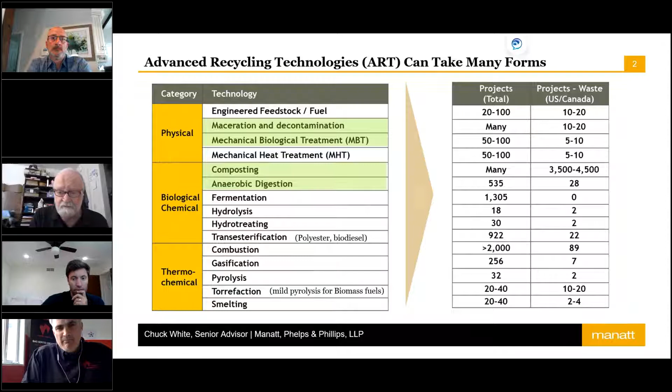Advanced recycling technologies are non-incineration technologies; this isn't mass burn. It converts the non-recyclable portion of the solid waste stream to electricity, fuels, and/or industrial chemical feedstocks. Waste to energy, fuels, and chemicals was an acronym that Scott Smithline, the former director of CalRecycle, back about 10 years ago, tried to push forward, the idea that maybe we should look at these additional kinds of technologies. And the reason for doing so, it would enhance the circular economy to allow these materials to be returned to useful, beneficial use within the economy.

Less reliance on fossil extraction, there's greater revenue potential, and other benefits involving lower greenhouse gas emissions, maximizing the recovery of recyclables. They can be community sized and scalable, much more efficient and versatile. And the three technologies I really look at the most, although there's many others, are gasification, pyrolysis, and process engineered fuels that can be used in industrial furnaces such as cement kilns.

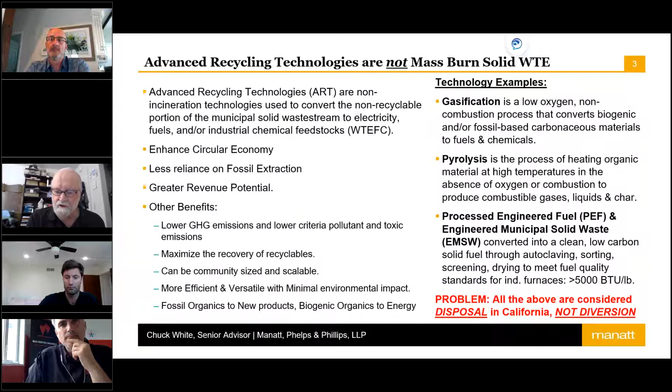You've got all these provisions in the Public Resources Code that basically prevent you from using advanced recycling technologies because they're either a form of what's called transformation or engineered municipal solid waste conversion, both of which are considered to be disposal. There's a couple exceptions to that.

For example, there is a definition that allows gasification, but the kind of gasification as defined means it cannot use any air or oxygen at all and can't have any discharges to air or groundwater, and can't produce any hazardous wastes. Well, there's few things that are possible without any discharge at all or any kind of production of a hazardous waste. And that should not be the criteria. It should be whether or not these discharges or production of hazardous waste or other contaminants are managed within the environmental criteria otherwise required by the state of California and elsewhere.

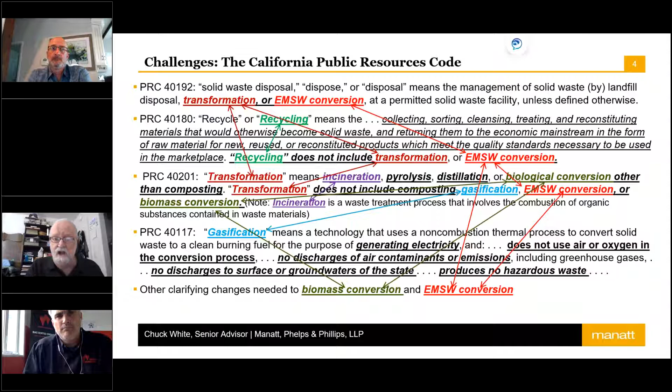And that's the real issue. We shouldn't just simply define these technologies or these kinds of things out of the equation for consideration to help us reach these 75% and beyond to really achieve a true circular economy.

What are the environmental concerns? Well, advanced recycling technology, otherwise known as conversion technologies, which is kind of a bad term these days. It conjures up a thing of dirty energy and this sort of thing. But these are not really waste to energy mass burn projects. They really shouldn't be controversial because it really would help and maximize the beneficial recovery of other kinds of materials, and glass and metals can be more easily recovered.

Plastics and organics, fossil organics, can be recovered to make new plastics. They don't have to be burned. They can be broken down to the molecular level and reconstituted into new products. And that portion of the waste stream that is non-fossil organic or biogenic can be made into low carbon fuels. Is it unproven? No, most of these technologies are in widespread use around the world.

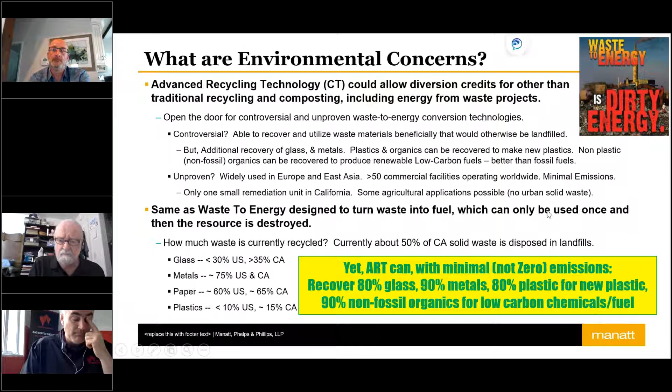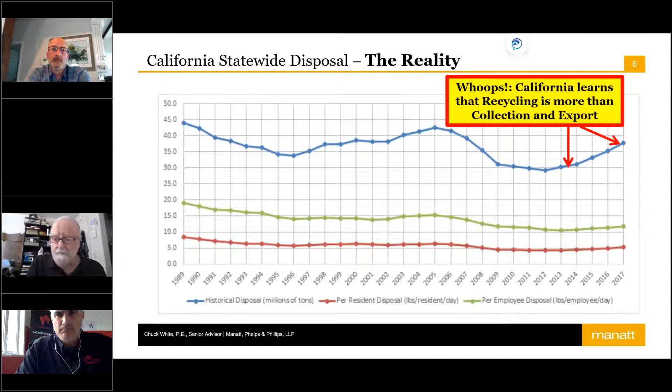But wait, there is this thing called SB 1383. If this was in person, I'd ask everybody, have you ever heard of 1383? And there'd be a large chuckle, I'm sure, from the audience, because of course you've all heard about it. And of course, the purpose is to divert organic waste from landfill disposal to reduce methane emissions that are coming from landfills. 75% organic waste reduction by 2025. I'd ask for a show of hands now. How many people think we're going to meet 75% organic waste reduction by 2025?

It's highly unlikely. And the other issue is a word of caution: even though it's 1383 recycling, the 75% recycling, it's not the same as AB 939 diversion. And this is kind of highlighted by this Article 2 that's in the 1383 regulations. It allows other technologies that constitute a reduction in landfill disposal of organic waste. Those technologies include recycling centers, food recovery, composting, anaerobic digestion, biomass conversion, land application, animal feed, but also a new area called approved operations that reduce short-lived climate pollutants.

If you have such a technology in an operation, you'd have to apply to CalRecycle with review by CARB, but you can't do it until January 1 of next year, because that's when the regulations take effect, unless the regulations get delayed by pending legislation, which is being considered. So the problem is you can't really get access to Article 2 until the regulations become effective. You've got to show that the greenhouse gas reduction is permanent, but it could include waste to energy, fuels, and chemicals. And you've got to show that the diversion of organics is equivalent in landfill methane reduction to that achieved by composting, for example.

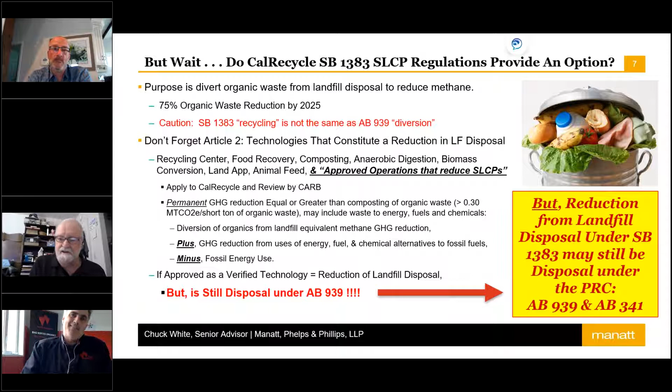But the big catch, as I mentioned above, is it's still considered disposal under California's AB 939. So it could be reduction from landfill disposal under SB 1383, but it would still be disposal under PRC if you're using some of these advanced recovery technologies. And that's obviously an issue that needs to be fixed as we move forward.

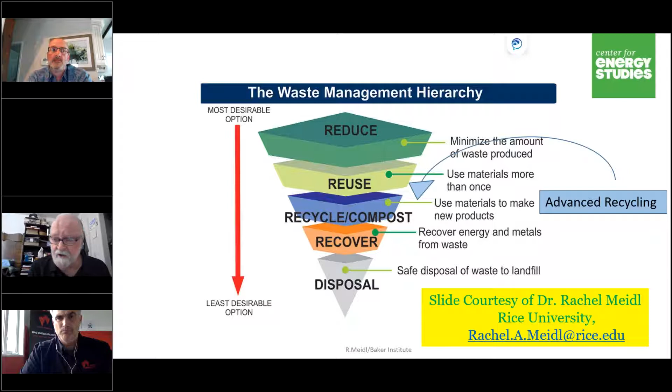And here's the plastics problem, particularly as pointed out by Dr. Meidl: in the US and Canada, 90% of plastic waste ends up in a landfill or is incinerated. And that's basically 34 million metric tons, which cost billions in disposal fees. The lost commodity value from unrecycled plastics is even greater.

And really, there isn't anything that can be done with plastics other than to break them back down into the component molecules and make them into new products, or if it's low enough carbon and doesn't raise greenhouse gas emissions concerns, use it as a source of energy. But fossil plastics, in my view, need to be limited to only recovery of the molecules for purposes of making them into feedstocks to produce new products and materials.

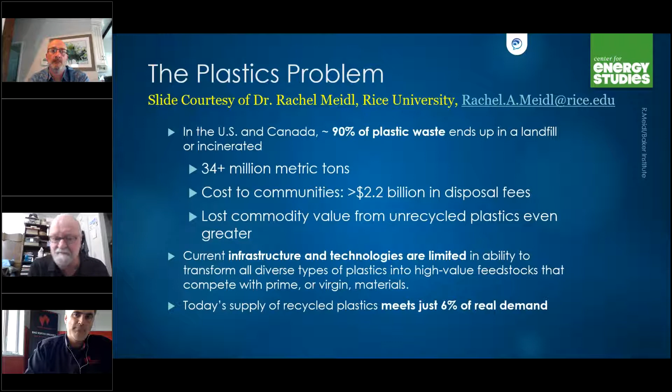And today's supply of recycled plastics just meets 6% of the demand. For 94% of plastics there is not effective use. And that really causes problems, as is pointed out in this next slide, again, courtesy of Dr. Rachel Meidl, Rice University.

California has these competing priorities. In fact, they've always had competing priorities. For example, zero emission vehicles by 2030, and hope to have all vehicles, including trucks and buses, zero emission vehicles by 2045, if not sooner. And plastics are the second most commonly used material to make low emission vehicles, 50% of the vehicle volume, and that's probably going to be increasing. And there's 39 different types of polymers and plastics that are used in zero emission vehicles.

And current recycling of plastics in cars is very low quality. And so you really can't access it without taking these advanced technologies and breaking the material down into its component parts and reconfiguring it into new products and materials, hopefully new zero emission vehicles. You've got this 100% requirement also for carbon emission-free electricity by 2045 or even sooner.

There's an increased demand for complex multi-material plastic for wind blades, for solar, for electrolyzers, but the only option really for most of the waste from these kinds of activities is landfill and incineration. So increased mining to produce more minerals is going to produce more waste. Reliance on offshore supply chains for extracting and processing. All this can be addressed if we could have access to advanced recovery technologies to recover the molecular value of materials that are ending up in the residual waste stream.

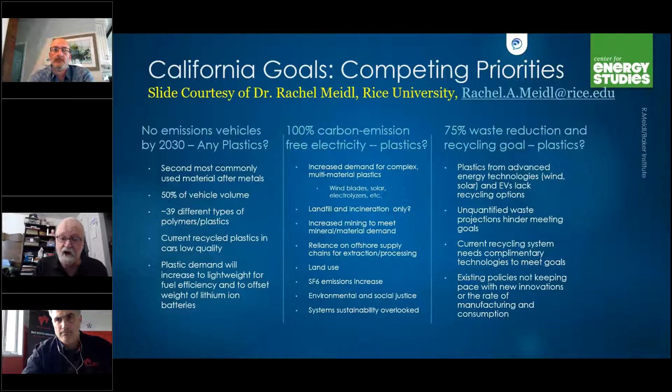So I'm finished for that. That's kind of the lay of the land as I see it. I think we've got a lot of work to do with the legislature and the administration and our friends in the environmental community to try to get them to understand that in order to get 75% or more, and really create a true circular economy, we're going to have to open the door for advanced recovery technologies sooner rather than later. And it's been a long time coming, and we still have a long ways to go.

So hopefully the folks that are going to be coming after me in today's session will open the door further for some specific technologies that will allow the enhanced processing and recovery of residual solid waste.

I'm going to go through a process that TORXX developed over the last year to repurpose typical MSW fines that up to now were mostly going straight to landfill because they were too hard to upgrade or turn into a usable product. So basically, using our Pulverizer technology, we've been able to fraction the material enough to allow recovering up to 70% of its organic content.

That material is coming from the front end pre-screening of mixed waste, and it's still really rich in organics, especially on the West Coast or in regions where it's all in the same bin. So by processing that material and recouping the organics, they can easily be mixed into compost feedstock, or used for land application or any organic application that's available on the market.

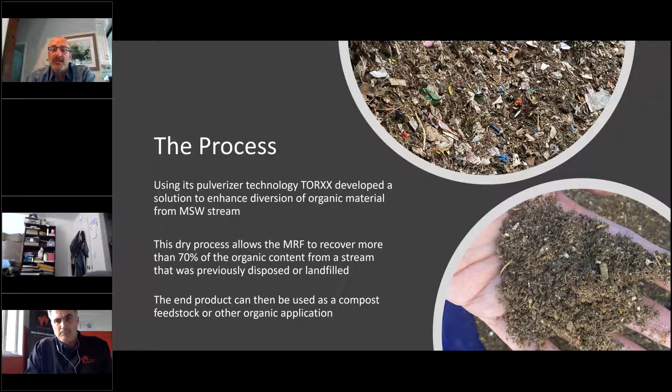So basically how it works is we rely solely on aerodynamic physics that we developed. The machine is not grinding or cutting the material, the machine is agitating the stream into vortices, and basically because of the matter-against-matter action, once the material gets into the machine, it liberates the organics and pulverizes any aggregates that are in there, like glass or little rocks. Those will turn to silt, which is in fact beneficial for compost.

But the other big advantage is the softer material. Think about juice pouches or chip bags. Those will not be destroyed, so after it's been processed through the Pulverizer, you can easily classify it and screen it with conventional techniques.

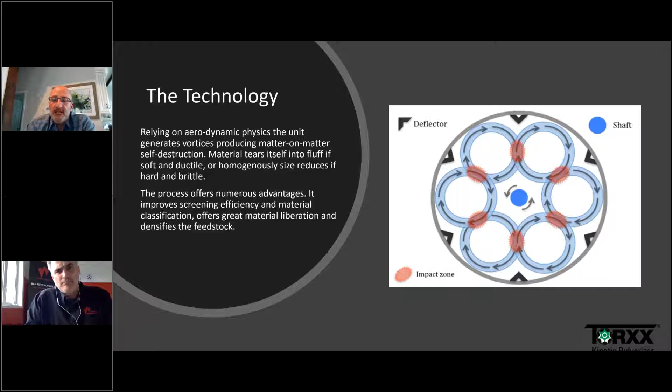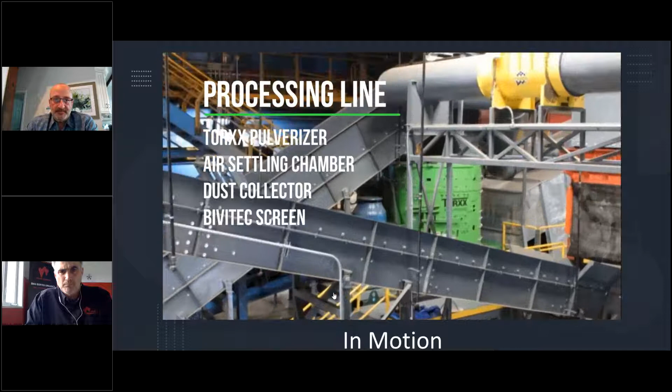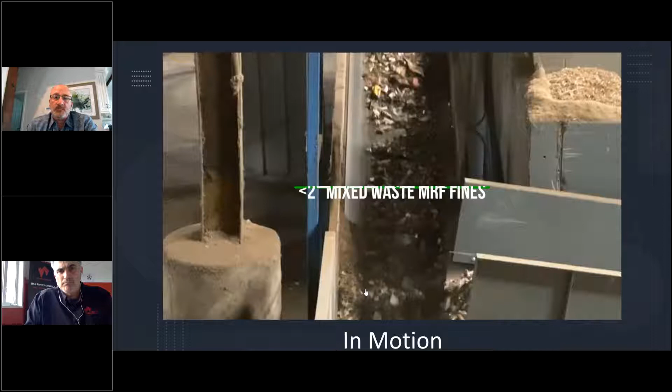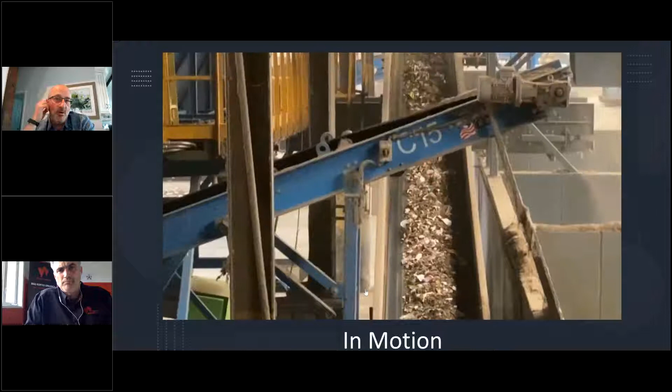So just to give you an overview, we'll go through a quick video of an installation we have in place, which is actually processing those mixed waste fines. So that's the actual feedstock that was going to landfill previously, which is all the 2 inch minus material coming from the front end. We're metering that material to the machine at a pace that ranges between 12 and 14 tons an hour, which pretty much meets the requirements of a medium to large scale mixed waste sorting facility.

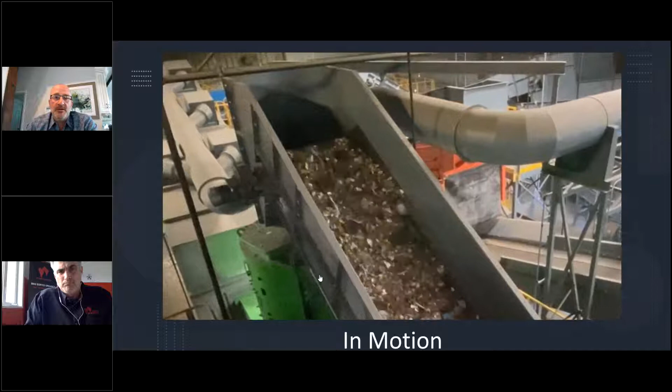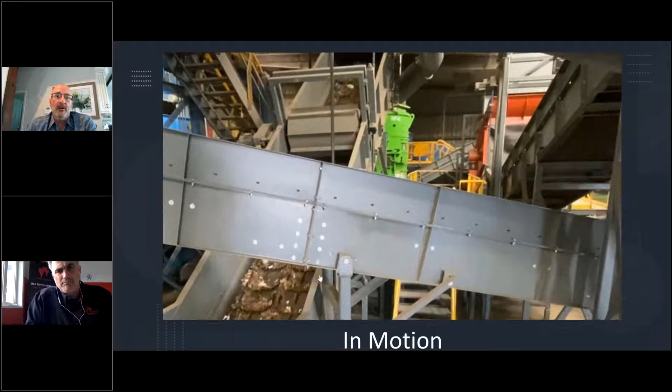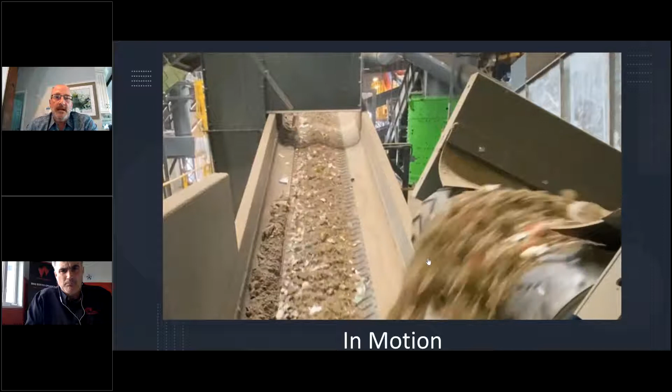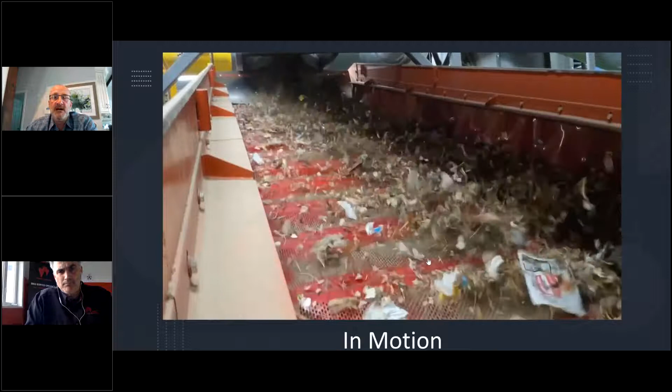So all that material is introduced all together into the machine. Then the pulverizing action happens from there. That's the output of the machine that we are migrating to a screening media like you see here. All the oversized fraction is mainly trash, things that are not organics because they didn't size-reduce. And on top here, that's the organics material being homogenized and size reduced by the pulverizing process. And on the bottom, you have your actual residue.

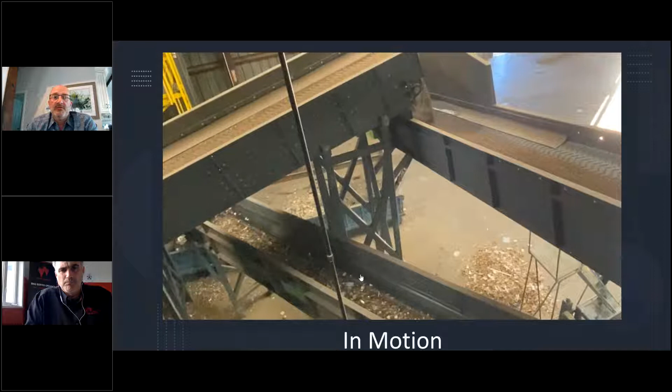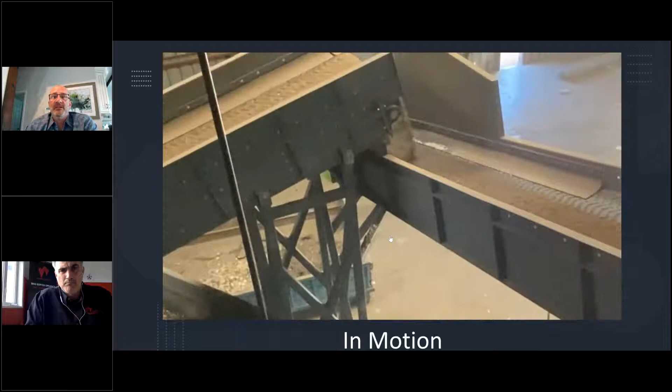So up to now, we achieve pretty much 70% of the inbound weight of that 2 inch minus mixed waste. Pretty much 70% by weight comes out in organics that can be mixed with compost or used for land application or any organics fraction. So that's what the organics material looks like at the end of the process. That's the screened material that we've already seen people using for composting.

So you see it's really granular, it's really consistent in size. So what we also figured with the machine is there are multiple other applications that we can run, or multiple other types of feedstock, like shingles, for instance, compost overs that are actually discarded because of the difficulty of removing the contaminants, land clearing debris, C&D fines, which have also been a topic the last few years. So by processing it through the pulverizer, we actually greatly ease classification of material and repurposing of good material.

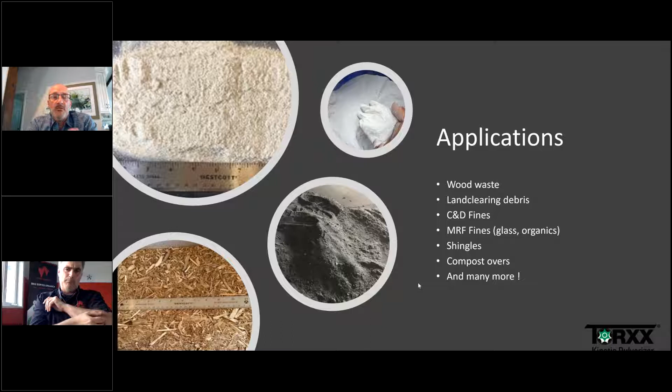So that's pretty much the concept we had in production.

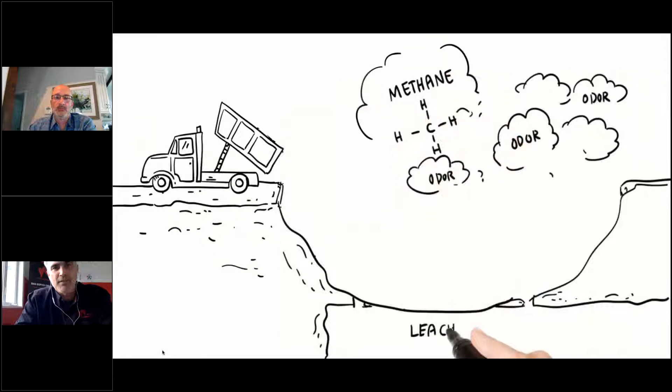So we're Waste Robotics. The presentation is about two methods of collection for the organics, what we call organic co-collection and organic cart collection. So we're going to try to show the difference. We all know that the overall target for diversion of organics from landfill is trying to limit the fugitive emissions, mainly for GHG reasons.

Most of the systems right now targeting collecting this organic use a three bin system. So we have the garbage, we have the recyclables, and usually people will add a third route for collecting the organics in a third bin. What we are proposing is that instead of deploying a third cart and a third route, we distribute bags, and we ask the citizens to put the organics in that bag, let's say the green bag, and drop that green bag within the garbage bin for co-collection at the same time as we're collecting garbage.

So it seems to pause here. Sorry. Well, you get the idea.

And thereafter, the idea is that we're extracting the organics with a robot. So the idea of picking up with a bag system is hard to implement if you don't have an automatic way to remove it, and it's fairly difficult to remove it. We have a lot of recycling pains right now in MRFs and others. So to say we're going to do bag collection and remove these bags from the MSW with people just doesn't make much sense.

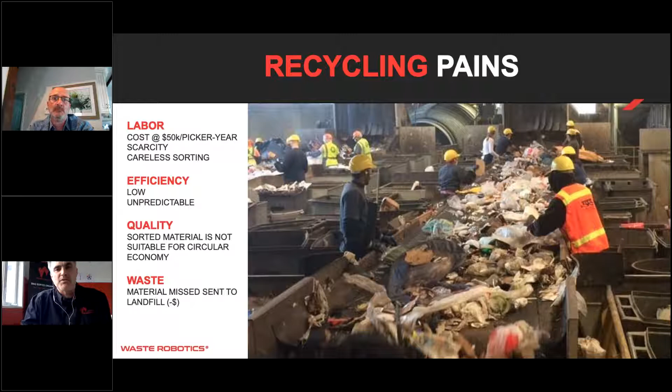So what we're coming in with is technologies to recognize these bags on the belt, capture them with great accuracy, and reconfigure systems. So the bag system and robotic sorting combined becomes really interesting, because now you have the ability not only to save on collection, but also when you have to sort it out, you do it very efficiently through a robotic system. So I'll try to show a video here.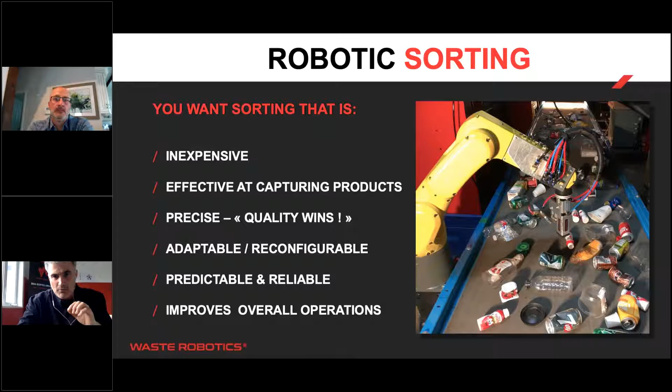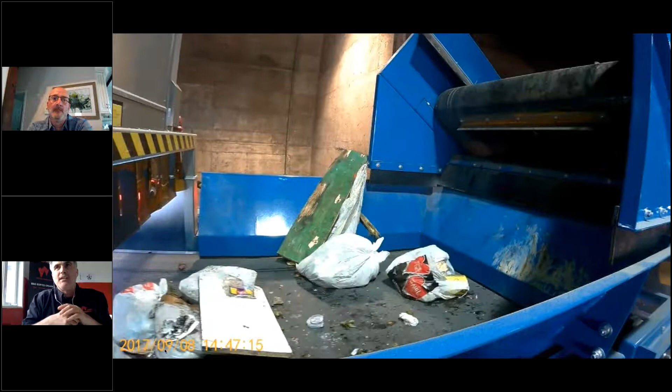So this is a system we have in the incinerator in Quebec City. People put their organics in that little green bag that you see there, and the robot detects it and goes and picks it out. So this is MSW without any screening, straight off the tipping floor, being loaded right onto the line, and the bags being picked. The rest of the material goes straight into the incinerator. So this is in a nutshell what this shows. So what are the value benefits and what does it do?

What we have observed in Quebec City, they've run different pilots and compared the efficiency of carts versus bags. What we discovered is that you get a much higher organic diversion, because people participate, because we distribute these small kitchen counter bags. People participate because it's clean, because it's easy to use. People just throw their stuff in there, tie it up and put it in their garbage bin. So overall, there's a lot of interest from the citizens to participate because it's easy.

The cost of collection is reduced by about 50%, because if you're going to run a third route for the next 20 years, for example, compared to just distributing bags and running the robot, the overall difference is about 50% in savings.

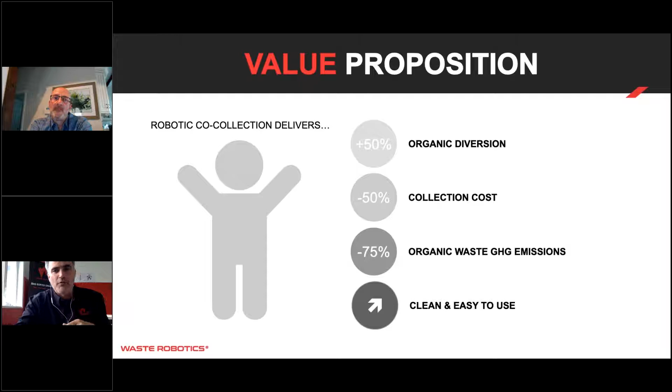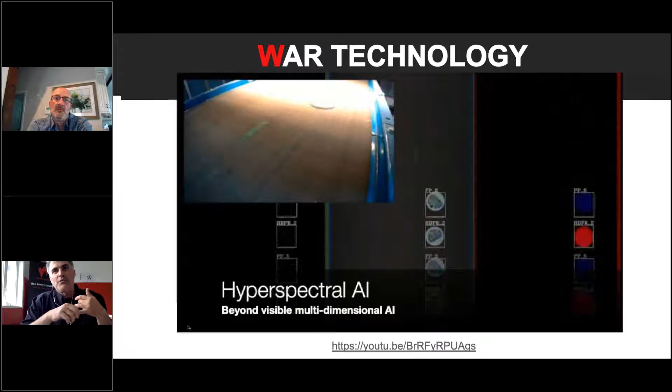So about the technology, just in a nutshell, what we do at Waste Robotics, we develop robots. So we have computer vision systems. We make scanners that will scan through the material. We look at the material through different types of cameras, hyperspectral, 3D, color. We can then be very precise in identifying products. This is very difficult to do with AI and/or humans, but with hyperspectral signals, we're able to classify this properly, and then we dispatch this to different types of robots.

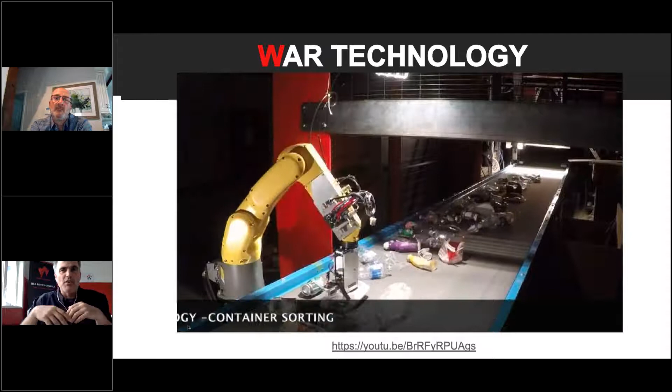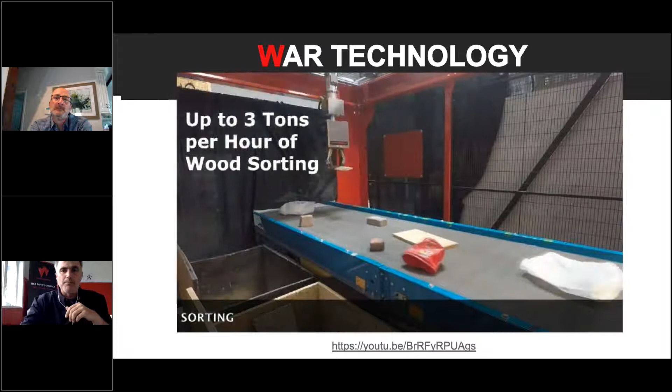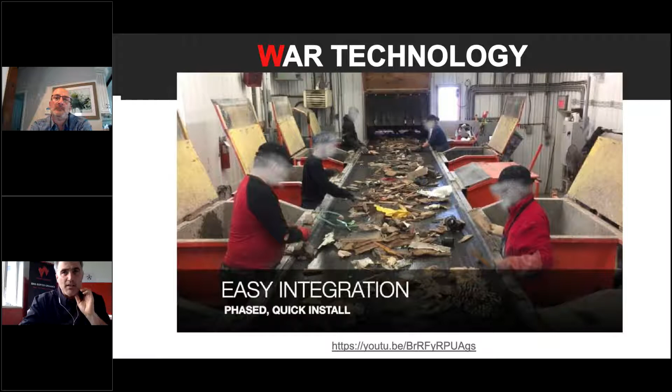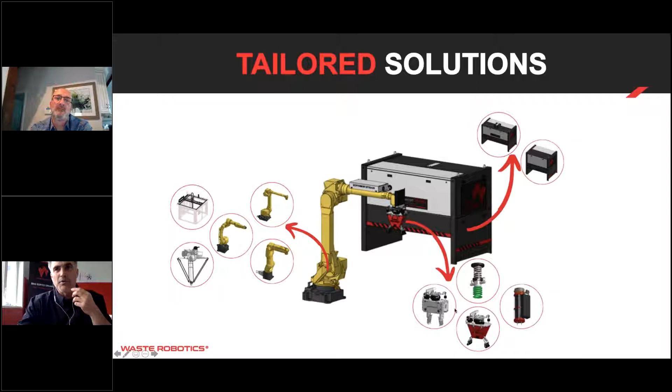So we are really into tailored solutions, the ability to adapt. Depending on the situation, we'll use different types of robots, different types of sensors and different types of grippers, because the overall robotic world is pretty much all about sensing and picking it up. The arm is kind of a commodity that we use to move that gripper in space and perform the picking.

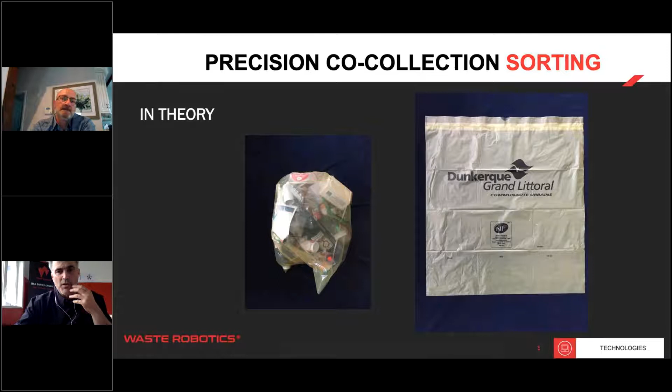Back to organics, we've come across different situations. For example, this is in Dunkirk in France. The city there said, okay, this is going to be easy, you're going to pick out yellow bags with your robot, but actually when the bag is filled, it's anything but yellow. So it became quite a difficult situation. These are the real life conditions that we're in right now. And that's where AI came in to help us, because just on color or shape it's very difficult, but we're actually able to collect these bags.

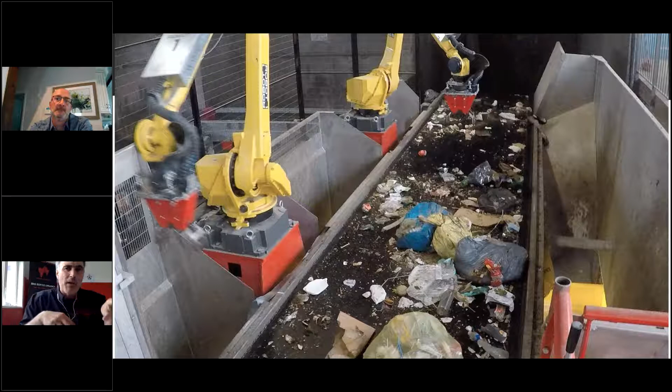Now, if you pay close attention, in Dunkirk we're not picking up organic bags like we are in Delano in Minneapolis. We're picking out recyclable bags. So that's another spin on this. What Dunkirk is doing now is their citizens put the recyclables in a bag, and starting the beginning of next year, they're going to have both bags, an organic bag and a recyclable bag. That's going to allow them to collect recyclables, organics, and garbage in only one truck route, which saves a lot of money, and GHG, which is one of the key drivers in this situation.

The other interesting thing about bringing robots to the situation is that it's the first time we actually have recording eyes on the conveyor. So we can teach one robot one trick and it can exchange it with another robot across the world. So if I'm picking out blue bags in Delano and run the same bags in Montreal, the learning doesn't have to be redone.

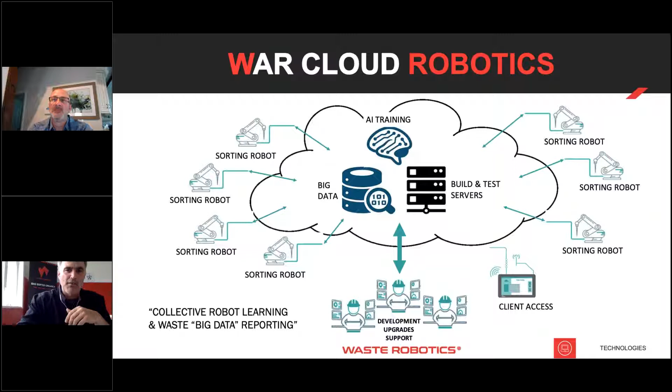But more importantly, not only are we picking out bags, we record everything we do. So we have the ability to replay the tape and reanalyze what's on the belt. And that data is getting very interesting, because people want to know, besides the bags and whatever you're picking, what else is left on the belt? That allows us to run statistics and composition analysis to assess the overall efficiency of the system and everything else.

And the other thing we do at Waste Robotics, some of our clients come to us and say they don't have capital. So we're offering what we call sorting as a service. We will make the capital investment if they commit to a contract, and basically they pay by the usage of the robot. We have a calculator online if anybody's interested.

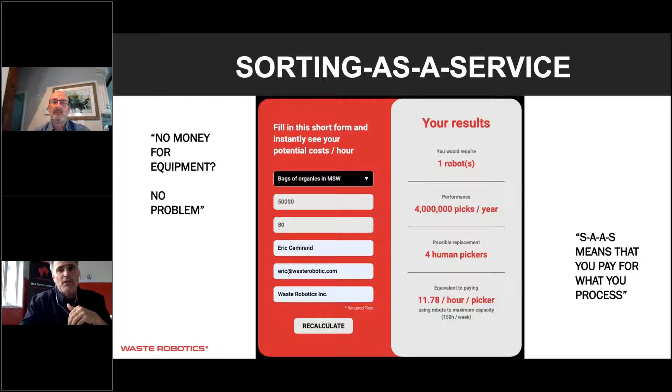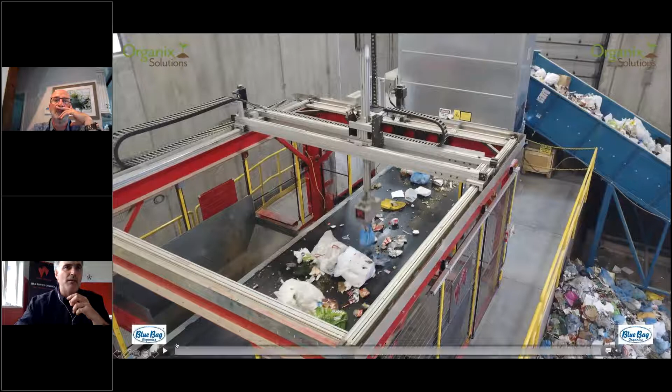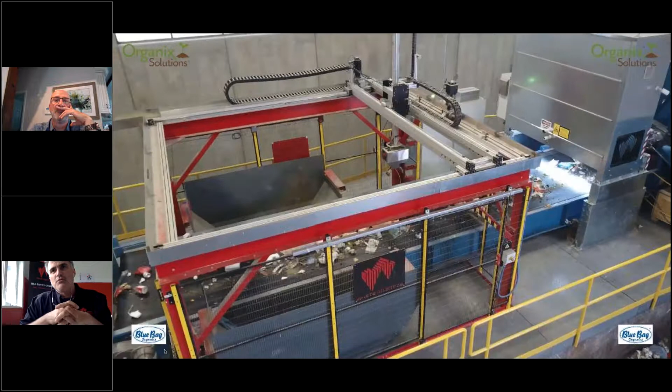So just to go back on organics, Quebec City is doing organic waste co-collection. We have Delano. As I said, Energipol in Dunkirk is doing recyclable bags right now. In Delano, this co-collection system has been there for a long time, but our robot was introduced there in 2018. In this situation, it's in a transfer station, so straight out of the truck, they load the line and the robot just picks out the blue bag.

In that case, that blue bag is actually a compostable bag, so it doesn't need to be opened. It goes straight to the composting site, and it's BPI certified, so it actually degrades within the 70 days. So it's a really good system because not only does it divert from landfill, it actually creates very good quality compost, because when people make the gesture of putting it in the bag, the quality of what's in the bag is really high. So that's an interesting thing to note.

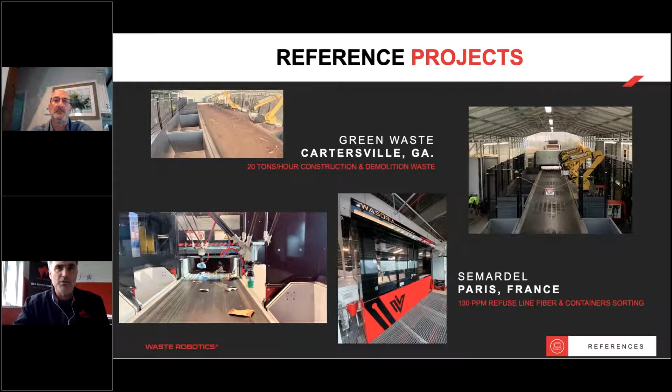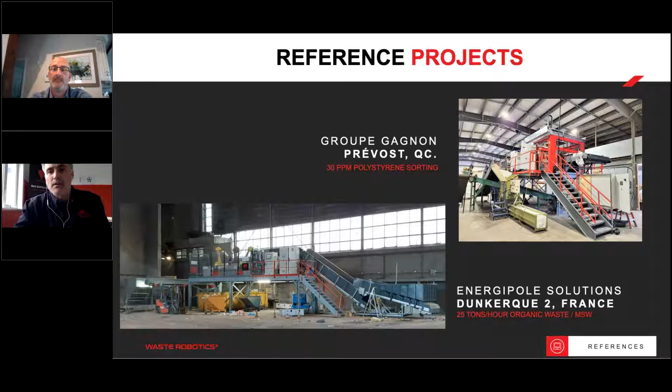I don't know how I'm doing on time. Quickly. You're doing good. Very good. Thank you, Eric. Right. I just don't want to bore anybody. These statistics look like they're important. Why don't you go ahead and run through them? Yeah.

So we sell systems. We're a company out of Canada, but we selected FANUC robots. They're the biggest robot manufacturer in the world. They offer a very large service network. So when we sell a system, obviously people want to make sure that it runs, so we have a very quick response time for any fixes that would have to happen on robots.

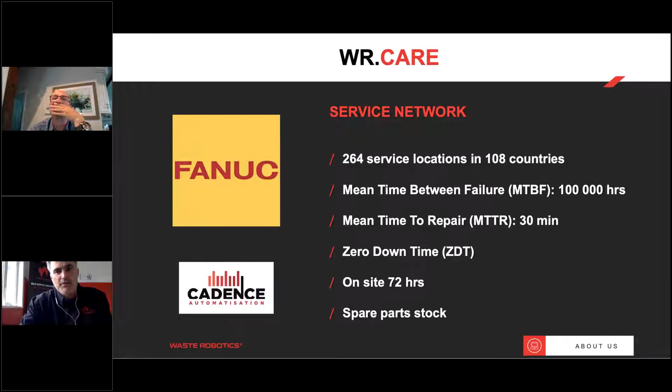Quickly about us, we've been doing this for 5 years now. We specialize solely in robotic sorting, primarily in the organic world. Most of our references are around organics, so we're pleased to have a chance to talk about it in California now. All of us have a lot of experience in waste, in robotics, and/or in computer vision. We're a small team, but a very passionate and solid team.

And we've received a lot of distinctions because we're coming to market with a very innovative approach, very different from what all the others are doing. We're really into tailored solutions, and especially with organics, we're really keen. It's picking up really heavily here in Quebec and in France, and we hope that in California or in other jurisdictions where they're driven to divert organics, we could actually make a difference there. So yeah, that's what I had to say.

Thank you, Eric. Good stuff. Appreciate it. A lot of interesting stuff in this series of presentations. Let's go back and pick up the question. Chuck, the first one was aimed at you about PFAS, its destination and how that's handled in the current legislation. Can you pick that answer up? It looks like Chuck is still silent. There we go. I got muted. There you go.